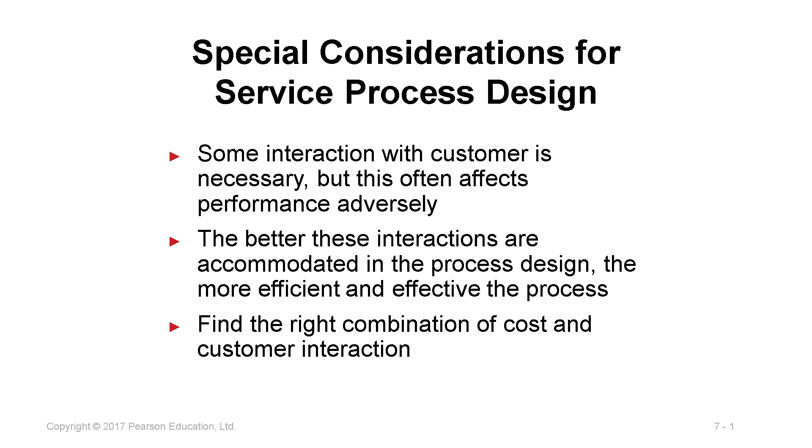So the important thing is that they have to find the right combination. This four-quadrant model gives more additional insight on how operation managers can modify the services processes to find the best level of specialization and focus while maintaining the necessary customer interaction and customization. This quadrant is based on degree of labor and degree of customization.

The upper section quadrant is called mass service and professional services. It's for high degree of labor services. Examples include commercial banking, private banking, law firms, stockbrokers, some boutiques, and some retailing.

In this upper level quadrant, we expect managers to focus more on human resources. These services processes focus more on personalized services, so it needs high level involvement, and they need very significant personnel selection and training issues.

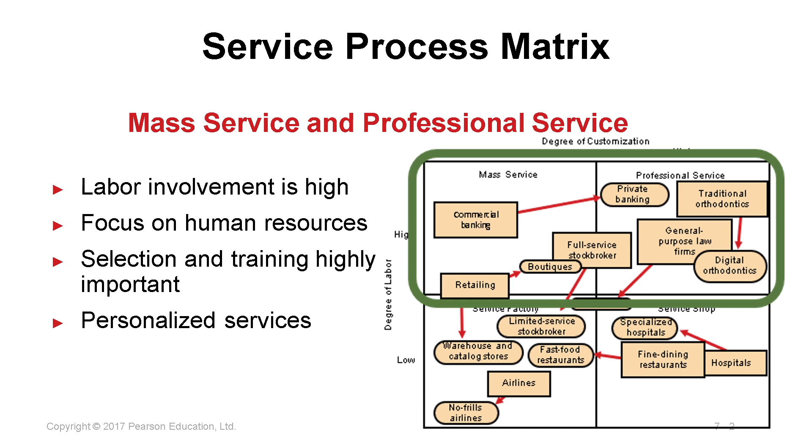The lower level quadrant is usually for low degree of labor involvement, meaning that services in this area use more automation and innovation. For low degree of customization, they tend to standardize their services or restrict some offerings to the customer, for example fast food restaurants.

When you go to McDonald's, KFC, Burger King, or Pizza Hut, they offer only a few menus, and the customer can choose only based on those menus. So it's standardized, with a limited menu.

Or maybe they do some automation for the services, for example checking into airlines using a vending machine, or you can buy airline tickets through online services.

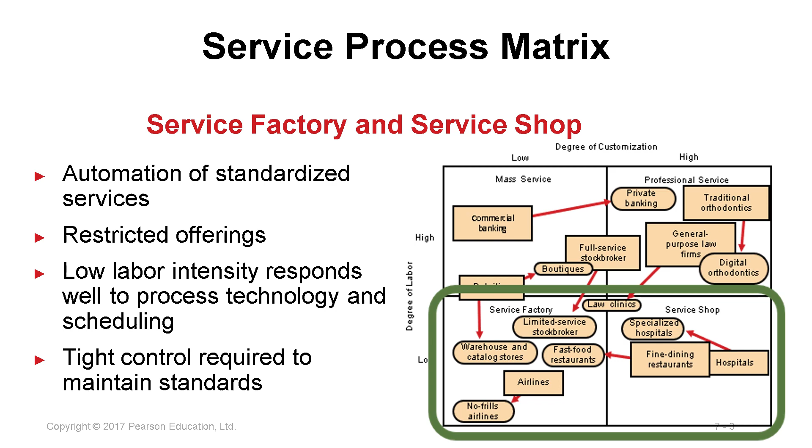For example, a supermarket has self-service. The customer can check the specific features they want using whatever technology is provided there.

Or maybe they can do self payment at the supermarket now. The customer doesn't need to go to the cashier, just go to the machine and self check out.

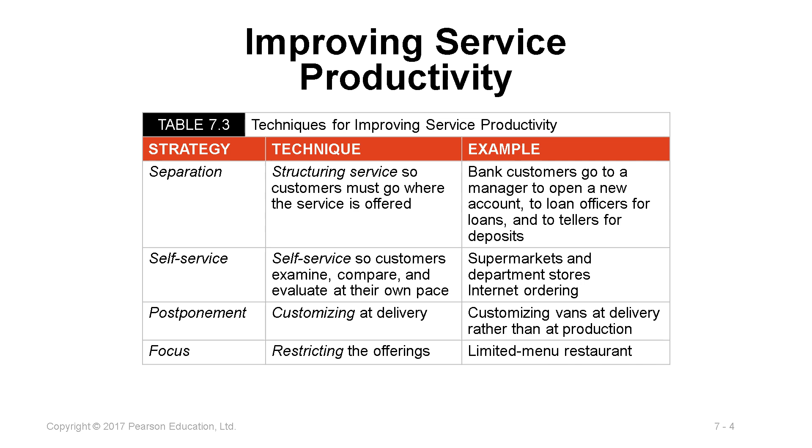Also, some restaurants just offer a limited menu as a technique to make sure they can offer efficient and effective services to their customers. So they just limit their services, not high customization, limiting options for their customer.

Automation, like an ATM, so the customer can choose any services based on the menu on the ATM machine.

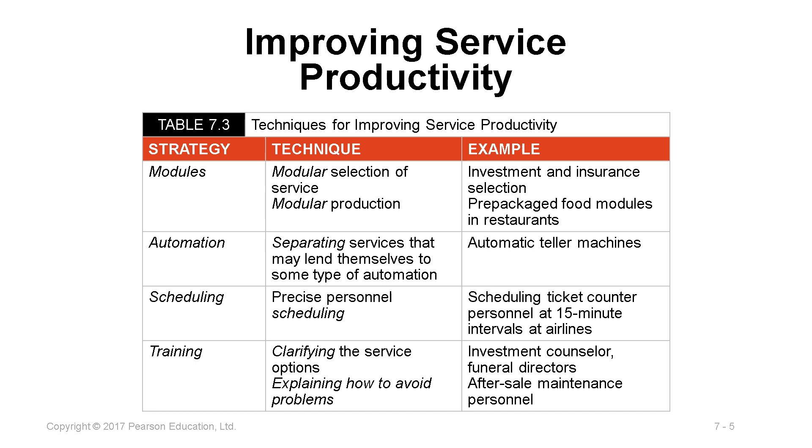And also, when you want to buy a Dell computer, the Dell computer company provides self-service on their website, so the customer can design their own product through that website. Some customers prefer to buy a laptop based only on what they need.

Selection of a particular process strategy requires a decision about equipment and technology, and this decision can be very complex for the operation manager.

Picking the best equipment requires understanding the specific industry and available process and technology for that specific industry. So the choice of equipment requires considering cost, cash flow, market stability, quality, capacity, and flexibility.

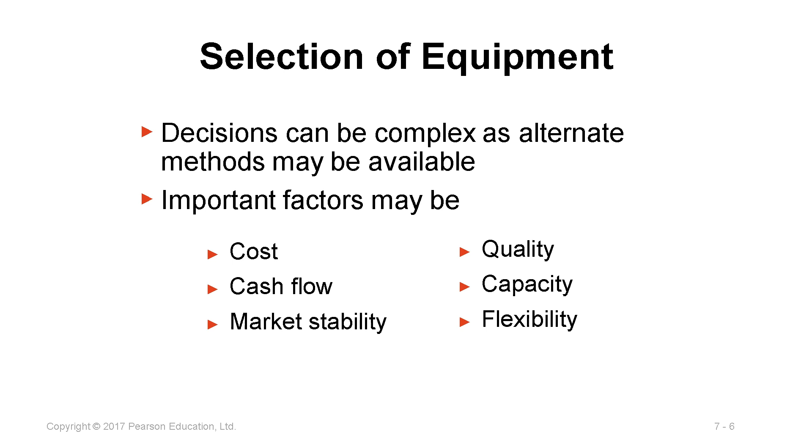In this age of rapid technological change and shorter product life cycles, adding flexibility to the production process can be a major competitive advantage. Flexibility is the ability to respond with little penalty in time, cost, or customer value. This may mean modular, movable, or digital control equipment.

Example: Honda's process flexibility has allowed it to become the industry leader at responding to market dynamics by modifying production volume and product mix.

But building flexibility into a production process can be difficult and expensive. If it's not present, change means you have to start over again. So consider what would be required for a simple change, such as McDonald's adding the flexibility necessary to serve you a char-broiled hamburger.

The changes may be necessary in: number one, purchasing. They have to purchase a different quality of meat, perhaps with more fat content, and supplies such as charcoal.

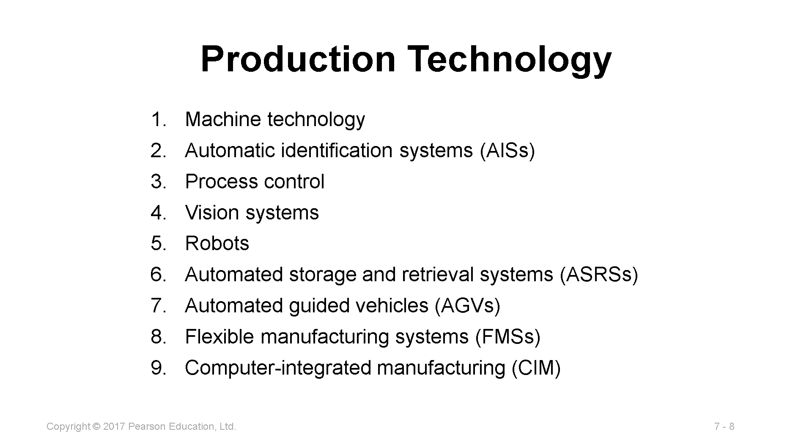Much of the world's machinery performs operations by removing material. This technology is undergoing tremendous progress in precision, productivity, and flexibility. Computer intelligence often controls this new machinery, allowing more complex and precise items to be made faster. Such machinery with its own computer and memory is referred to as having computer numerical control, or CNC. Its electronic controls increase speed by cutting change-over time, reduce waste because of fewer mistakes, and enhance flexibility.

New advances in machinery suggest that rather than removing material as has traditionally been done, adding materials may in many cases be more efficient. Additive manufacturing, or as it's commonly called 3D printing, is frequently used for design testing, prototypes, and custom products.

This technology continues to advance and now supports innovative product design for variety and complexity, with minimal custom tooling required, minimal assembly since integrated assemblies can be printed, low inventory through make-to-order systems, and reduced time to market. As a result, additive manufacturing is increasingly being used to enhance production efficiency for high volume products.

AIS, also known as barcode and RFID systems, is used to transmit information from one side to the other. This can improve data acquisition and reduce data entry errors.

For this to be done, managers must get the data into an electronic form. That's why when you go to the supermarket, they scan the barcodes from each product. They get the electronic data, key it into their computer, and transmit that information to the supplier, to know whether they need to stock up their supplies or not. That is AIS.

Another similar technology is what we call RFID, radio frequency identification. It uses a radio frequency and is better than barcodes, because the distance for RFID is quite far compared to barcodes.

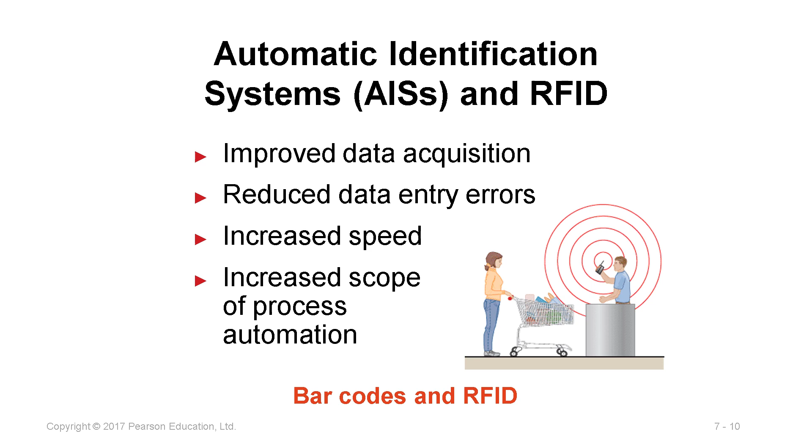Process control is the use of information technology to monitor and control physical processes. You use process control to measure moisture content, or to control the thickness of paper. When transferring from one machine to another, you want to control the quantity, such as in a petroleum refinery. So this is what you use to control some processes.

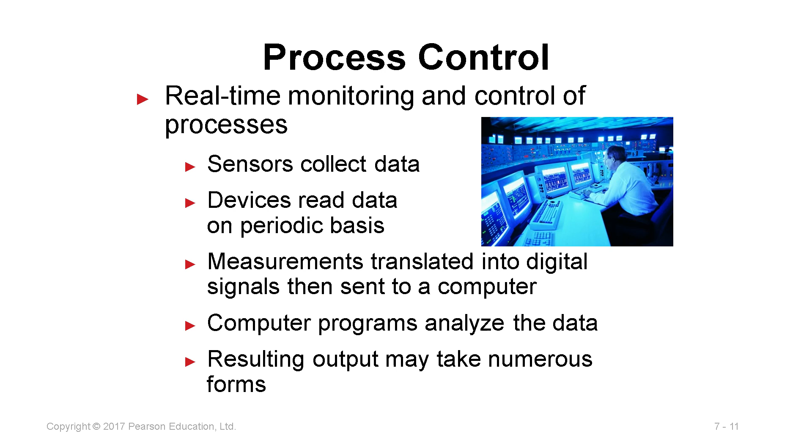A vision system is a technology that combines video cameras and computer technology, often used in inspection roles. Visual inspection is an important task in most food processing and manufacturing organizations. Usually the vision system is used when the items being inspected are familiar. If you produce a customized product, it's quite difficult to use this vision system. But if you produce a similar product, then it's easier to use the vision system.

If you use a human as a visual inspection, normally humans get tedious, their minds wander, they easily get bored, and sometimes make errors. That's why using this vision system is better compared to using a human for inspection.

Robots are machines that are flexible and have the ability to hold, move, and grab items. That is a robot. So usually we use robots effectively to perform tasks that are monotonous or dangerous. That's where we use a robot.

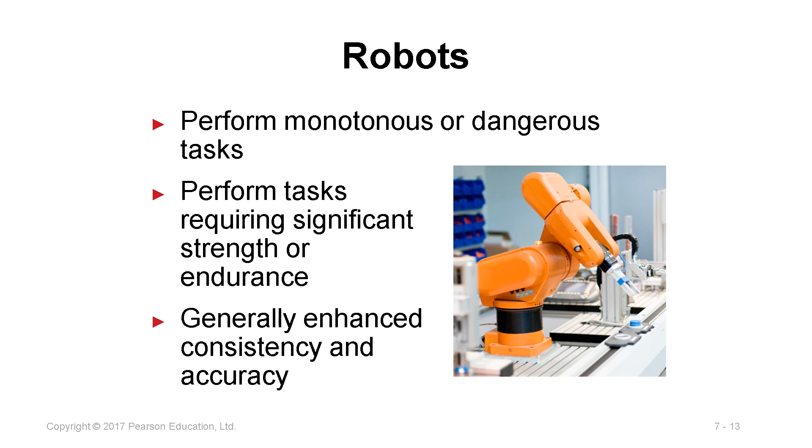Automated storage and retrieval system, ASRS, is usually used in the warehouse, to replace the human or labor involved, because sometimes they have errors in organizing the warehouse.

This ASRS technology provides the automated placement and withdrawal of parts and products. You just use the machine to go and pick up the item, so usually they can reduce the errors in picking up items in that warehouse.

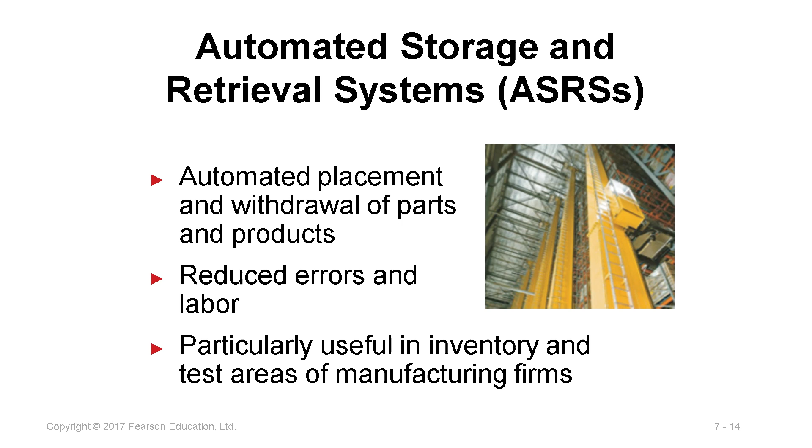This technology is commonly used in facilities, big retailers such as Walmart use this system, and it can also be used in inventory firms. This is organized for very large inventory.

The AGV, or automated guided vehicle, can take the form of monorails, conveyors, robots, or automated guided vehicles. Something that moves on the conveyor, we can also call it an automated guided vehicle.

This technology is electronically guided and controlled, used in manufacturing, to move products, parts, or equipment. Sometimes they also use AGVs in agriculture to distribute feed, or in hospitals or jails, but not yet in Malaysia.

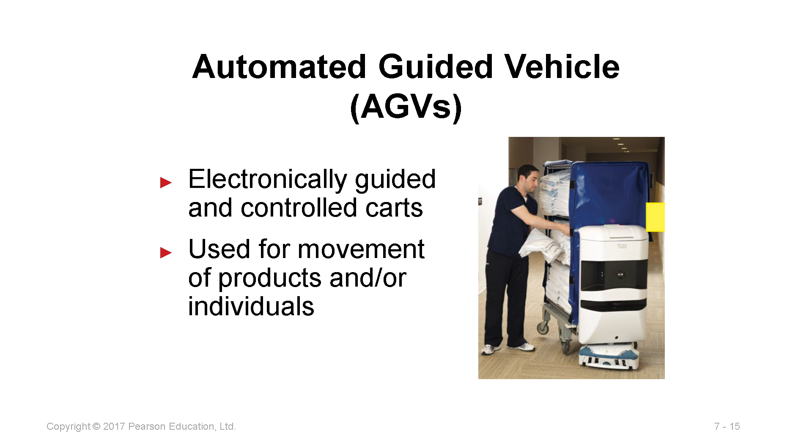When a central computer provides instructions to each workstation and to the material handling equipment such as robots, ASRS, and AGVs, the system is known as an automated work cell, commonly known as a flexible manufacturing system. This technology controls the workstation and the material handling equipment.

Usually the operators simply load the new programs, whatever they want to do, what materials, how to handle the materials. They simply load it into the new program and can produce different products in a very short time. This system can economically produce low volume but high variety of products.

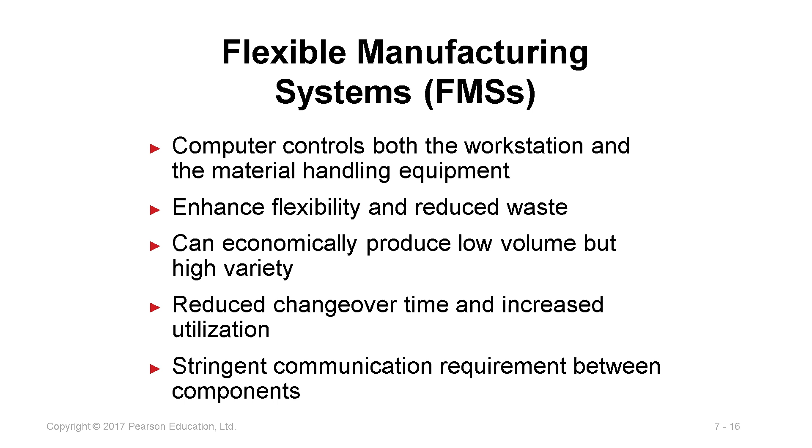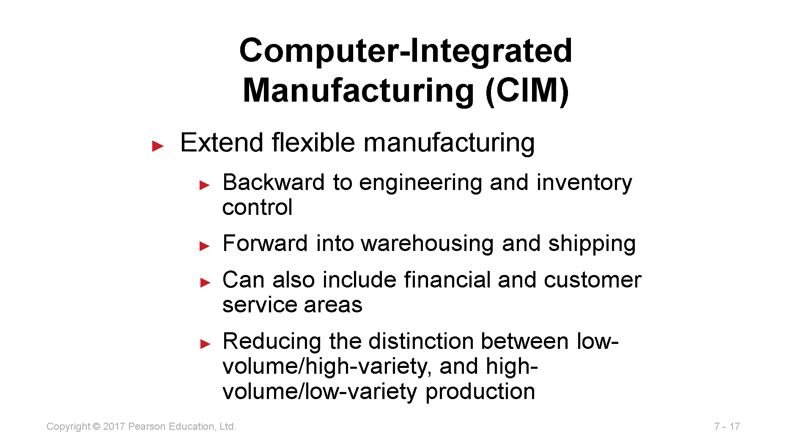Computer integrated manufacturing is a flexible manufacturing system that can be extended backward electronically into the engineering and inventory control departments, and forward to warehousing and shipping departments. This system, CIM, can control everything.

For example, we have one system: CAD, remember, to design the product. You can design the product through the system, including the movement information you design using the CAD.

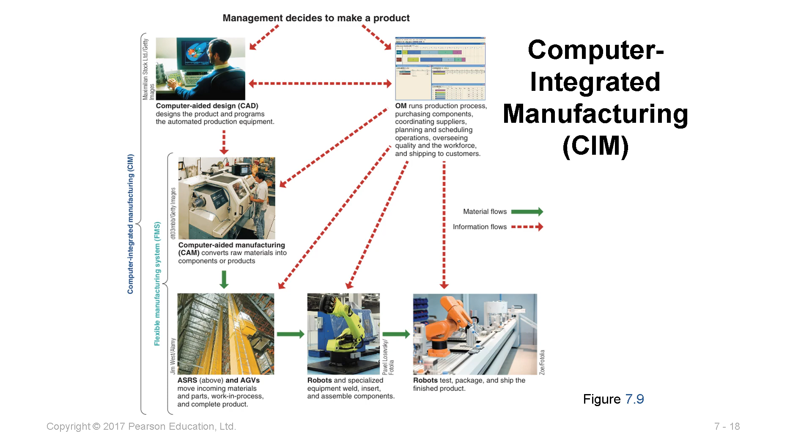The CAD transfers that design to the CAM, for manufacturing, to convert to materials, to identify the materials and components needed, and then transfers the information to the ASRS. They combine and go to the robots, and the robots produce the product based on the CAD design. So this is all controlled by one system, what we call computer integrated manufacturing, CIM.